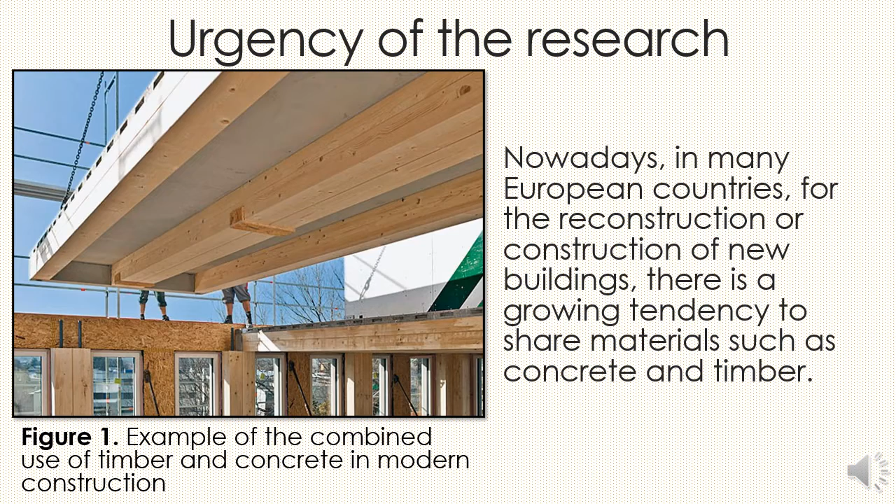Let's touch on the relevance of the research topic. Nowadays, in many European countries, for the reconstruction or construction of new buildings, there is a growing tendency to share materials such as concrete and timber. This is explained primarily by the fact that timber is environmentally friendly. Concrete has high availability, as well as the presence of many other properties of these materials that effectively complement each other.

The works of several researchers say that such constructive solutions as timber concrete appear to be beneficial for both the timber and concrete market. The former will benefit from the trend toward standardization and market expansion, while the second one will correspond to environmental requirements and better differentiate in a competitive market environment.

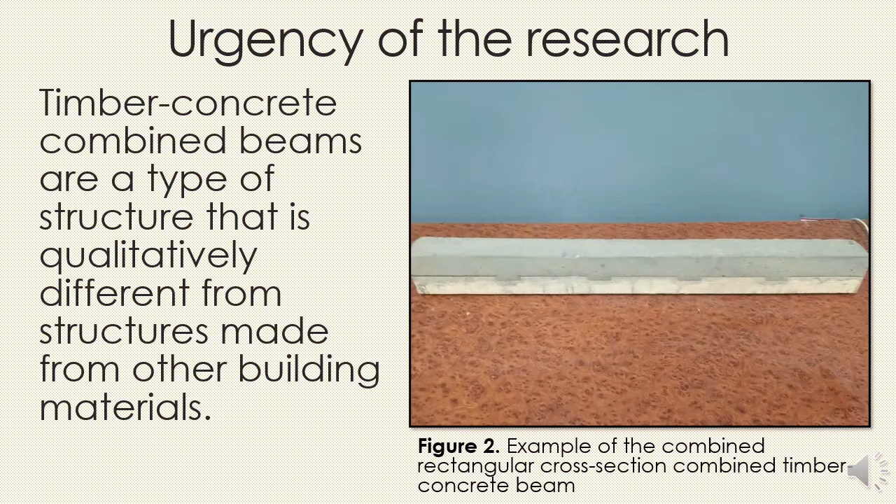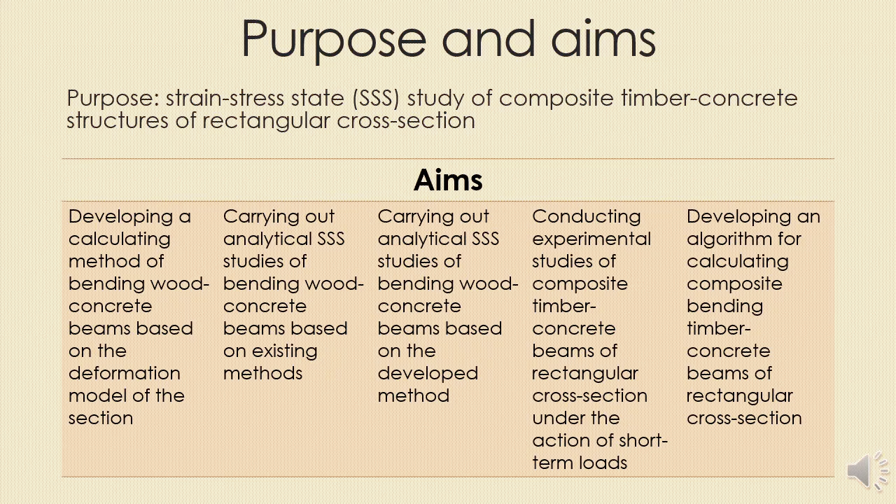The work purpose consists in stress-strain state study of composite timber-concrete structures of rectangular cross-section. The aims were to develop a calculating method of bending timber-concrete beams based on the deformation model of section, to carry out analytical stress-strain state studies of bending timber-concrete beams based on existing and developed methods, conduct experimental studies of composite timber-concrete beams of rectangular cross-section under the action of short-term loads, and to develop an algorithm for calculating composite bending timber-concrete beams of rectangular cross-section, taking into account the comparative analysis of the experimental and theoretical studies results.

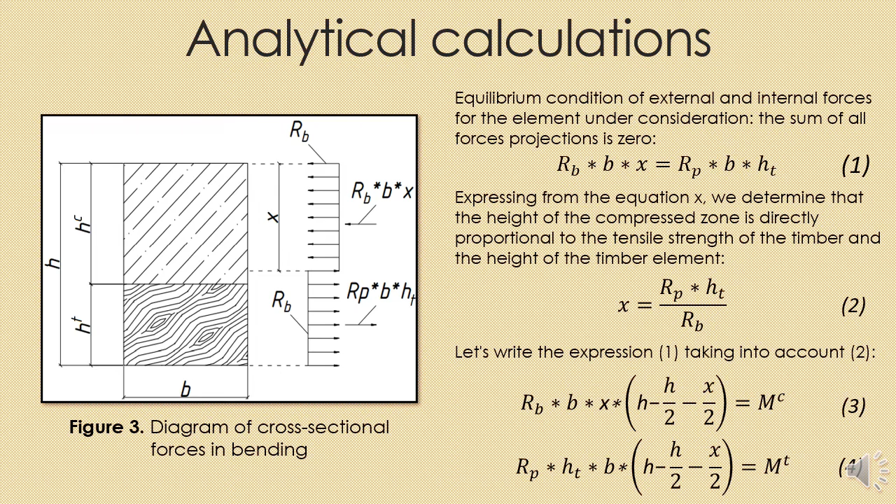The second calculation method implies the introduction of the modification coefficient n, which is the ratio of the elasticity modulus of concrete in bending to the elasticity modulus of timber in tension. In the calculations, we consider the loaded beam with concentrated forces in thirds of the span. Timber-concrete beams have 1 meter length and the section is 100 by 75 mm. Concrete is equal to 50x75x1000 mm. Timber is also equal to 50x75x1000 mm. B15 grade concrete and 2nd grade pine are taken as the materials of the construction.

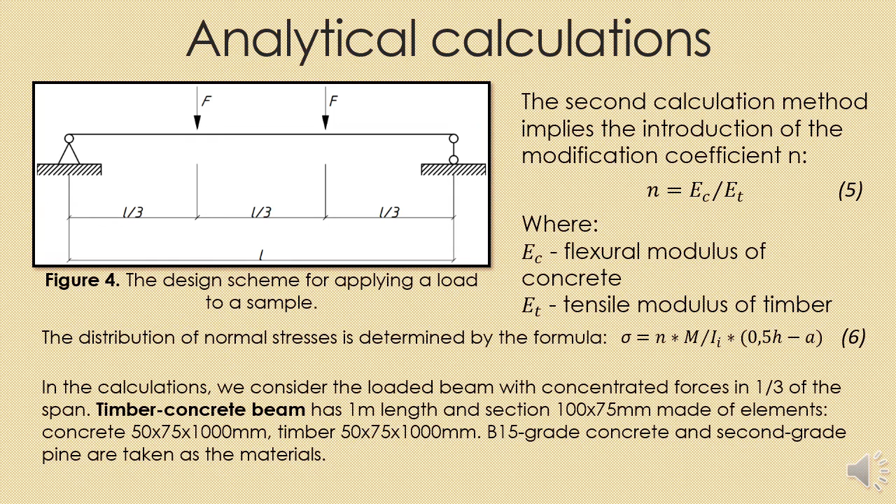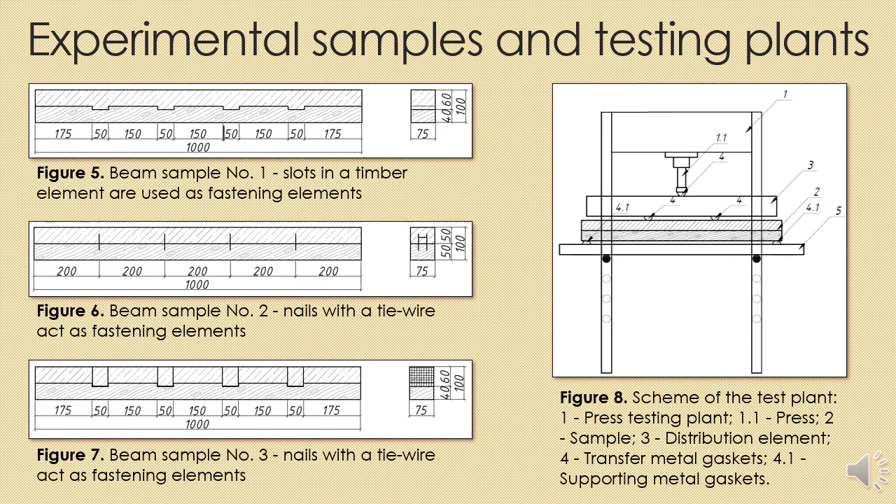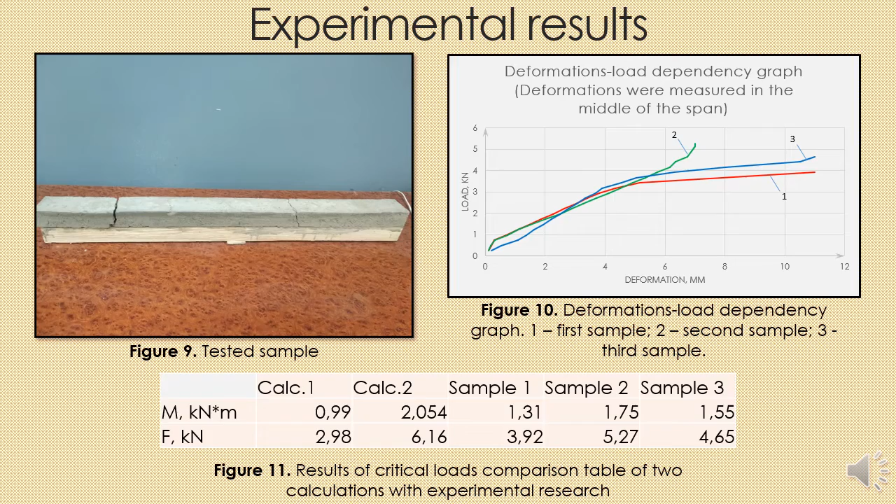Summing up the research, we obtained theoretical calculation and experimental studies results of a composite timber-concrete beam of rectangular cross-section, and carried out a calculating algorithm taking into account the comparative analysis of the results of theoretical and experimental studies. Based on a comparison of the theoretically obtained values and experimental data, we can see that the proposed calculation method allows us to determine the critical values of the force F and moment M of the considered type of structure.